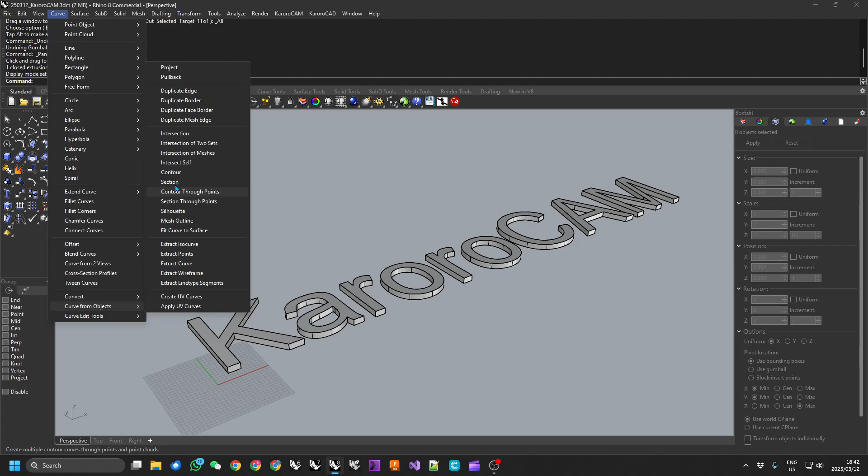And the first thing we need to do with these is we need to get the curves that we're going to cut. So I'm going to curve from object, duplicate face border, and I'm just going to grab the top surface of each one of these to create my curves. And once I have those, I can actually turn my letters off, and then I'm going to launch KaroroCAM, and this will just take a minute or so to load up.

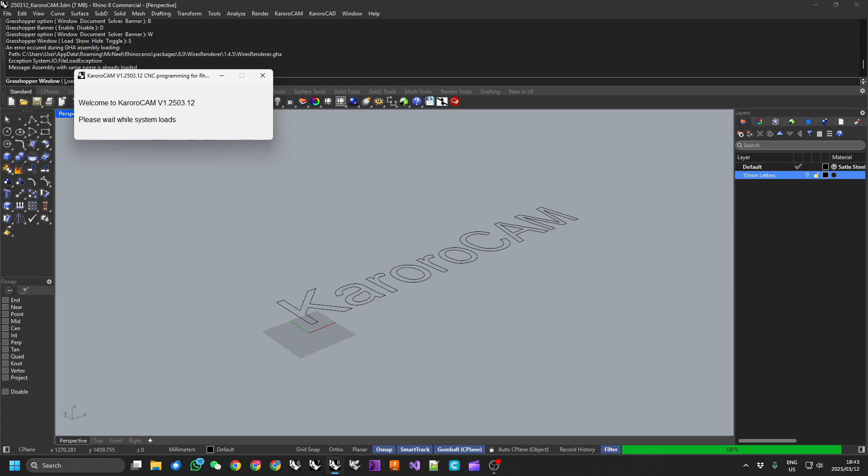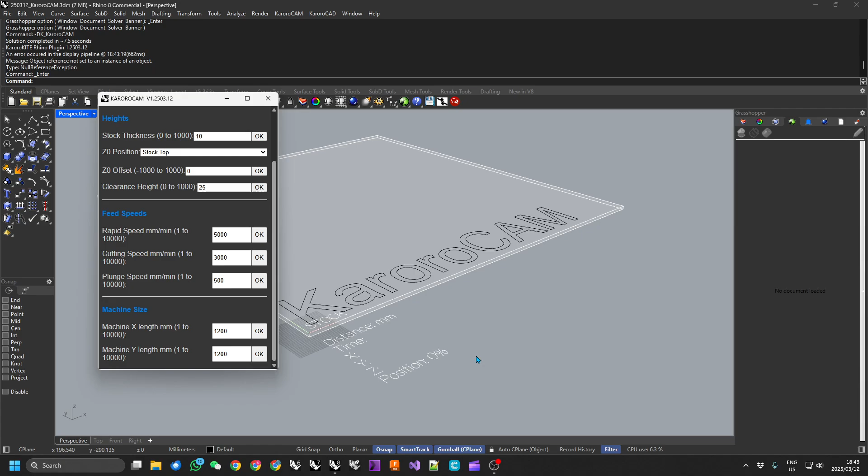Right, and first thing I'm going to do is go to my machine setup, and this particular machine that we're working with is a 4-foot by 4-foot bed, so 1200 by 1200. So I can just adjust that. The stock thickness is not really applicable for this sort of pure 2D cutting, so we don't need to change anything there, and we don't really need to change our clearance height or anything. So we can just leave all of that.

Now if we go to our toolpath, go to my layers here, and if we have a look, we can see that we have a new laser/plasma set of inside and outside curve layers added by KaroroCAM, and we can go down to those. We can just work our way through the settings here. Tolerance of 0.01 is going to be absolutely fine for this particular application. We want sharp outside corners. The tool shape we can't change, it's a laser or plasma.

Our kerf diameter is very much akin to the tool bit diameter for cutting operations, where your machine supplier will be able to advise what you should put here, but it accounts for the diameter that you have for your actual cutter, and for this case 1mm should be fine for this particular machine. We won't need any stock to leave. We're going to be cutting net to this, and we would like to use a lead in and lead out, but I will show you the difference between the two.

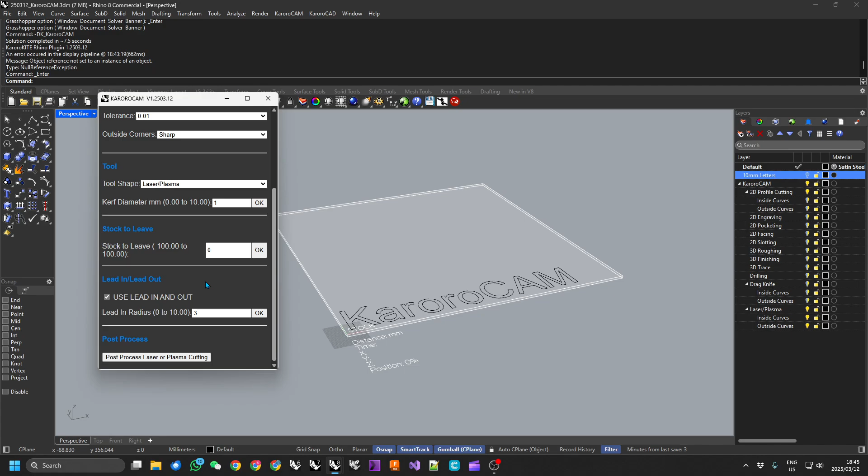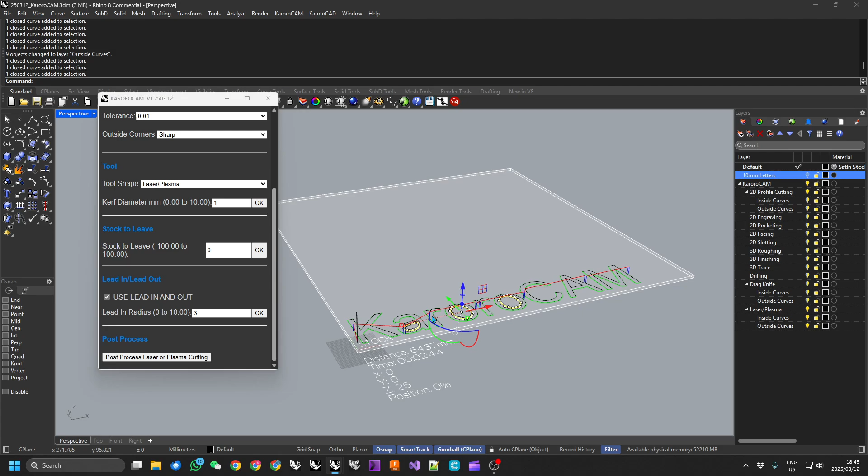So I'm going to take this up to 3mm for my lead in, and now I can go through and select all of my outside curves and move those onto the outside curves layer, and we'll already start to develop the toolpath. And then I'll grab all of the inside curves and move those to the inside curves layer.

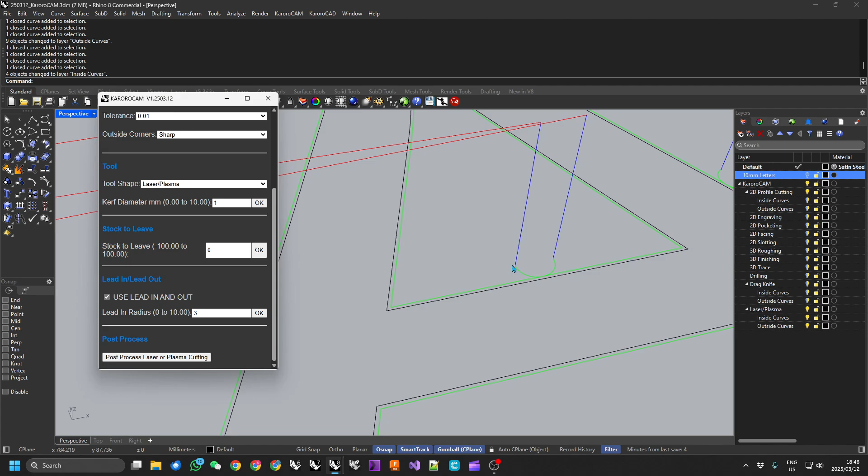Now if we zoom in here, I can turn off the lead in and lead out, and in this case the plasma without a lead out will try and pierce through right on the edge of the material, and the piercings can be a little rough and can be a little oversized compared to the head moving, and in that case using a radius lead in and lead out allows you to pierce outside of the stock and then come in. And we can just check to make sure we're not getting any interference on any of those, and on both the inside and the outside, they're all looking good on this particular case.

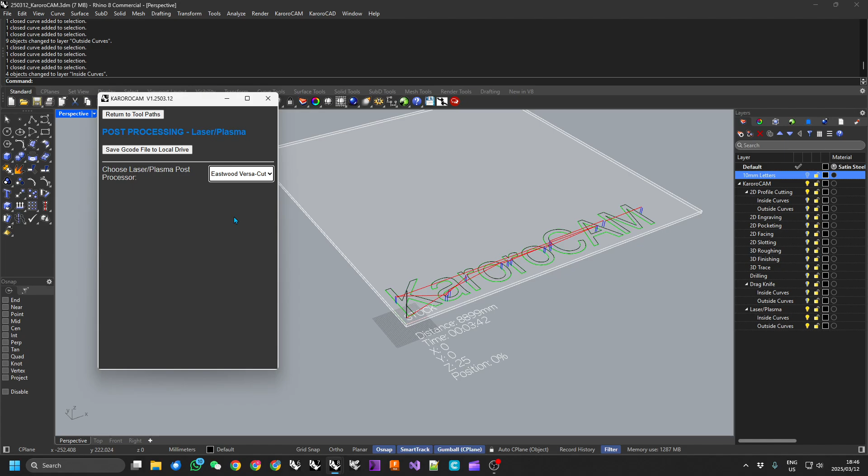So with all of that set up, we can now click our post process, and at the moment we just have a single machine in Eastwood Versa-Cut set up, but if you have any particular machine you would like us to have a look at, we are more than happy to create custom post processes for any machine on the market.

And once we've chosen our post processor, we can simply select Save GCode file, and this has come up with the name of this particular file that we're dealing with, the laser/plasma suffix and a .cnc. And there we go. And now with that exported, we can simply put that into our machine and start cutting.